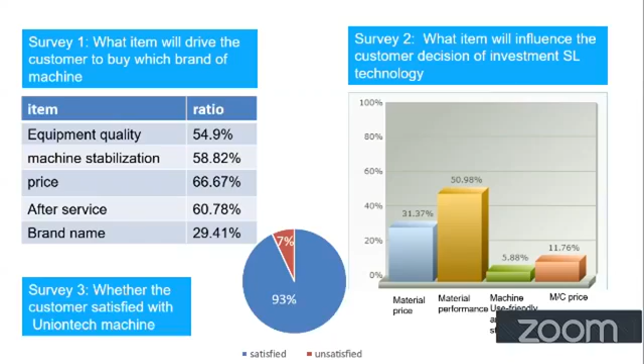Now we're happy about the result - there are 93% of the machine user owners happy about their choice to go for UnionTech. Still, we have some other 7% to fulfill in the future.

Now I would like to go through briefly about our technology and our products.

This SLA technology, from the right side, I can explain briefly by this simple structure map. By using a laser source, it will go through the scanning mirror, and the laser beam will scan on the liquid surface.

The part is built from the bottom to top, layer by layer. There is a Z-axis lift platform - once we finish one layer printing, the platform will move down one layer thickness to continue the coming new layer printing.

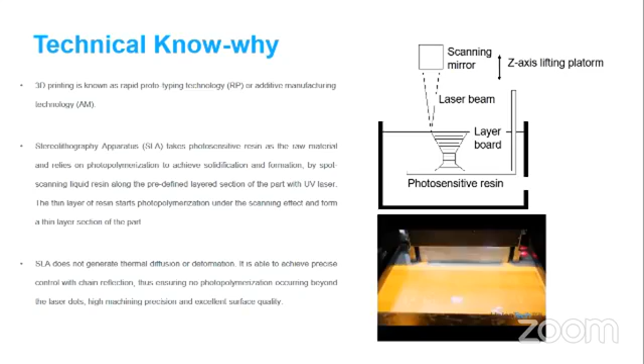And the active image in the right down corner just shows the general process of our building envelope.

Some features about UnionTech technology ensure high stability. I think there are three main systems to ensure this result: the first is the controlling system, the second is the optical system, and the last is the mechanical structure. So I will introduce the three systems one by one.

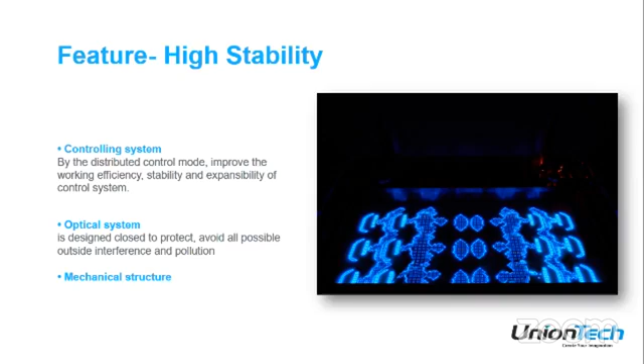Firstly, every single UnionTech machine has a hard granite base. This granite base ensures their recoater moves smoothly and gets accuracy - no flexing, a stable platform. This kind of granite base is a very good choice compared to steel, because it's not affected by temperature or environment.

And from the result, it will give printing quality that's very good, excellent surface work, and ensures very tiny details.

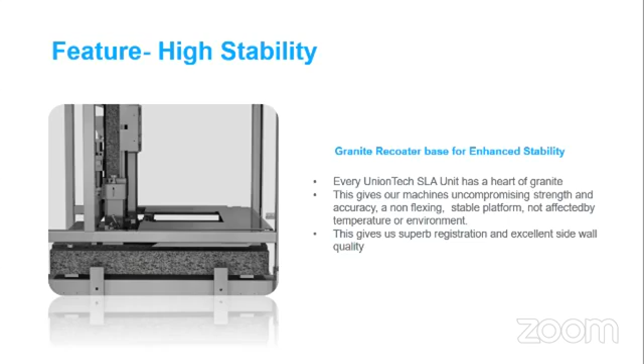UnionTech cloud package - from the left side, as you can see, we offer some packages to customers. One is our own printer, then for data processing software, we have some different choices for our customers.

We offer Magics from Materialise to our customers. As you know, Magics is a very common universal data processing software globally, and we have had the partnership with Materialise since 2002, 18 years ago. There's even a tailor-made software called Magics BP, Building Process, linked to UnionTech.

This is a tailor-made software for UnionTech, and we can sell this tailor-made software all around Asia - Pakistan and the Middle East are definitely included.

Meanwhile, we also developed our own data processing software, Polydevs, which is a much more affordable technology. You can get the main functions to deal with the data, to do the slicing, to add the support, to check the surface holes, etc.

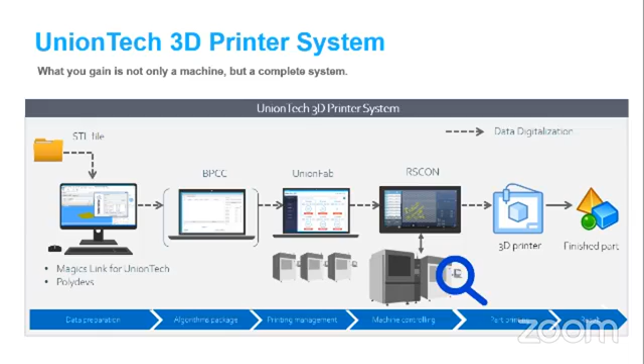Meanwhile, UnionTech also provides a full package of post-processing machines, like the cleaning machine, like the UV oven, etc. From the finished part, we will give you a guideline on how to do the whole process to get the final part. And even with our people, we'll talk with you about how to do post-processing treatment based on the part. Now, some key features about our technology.

Firstly, it's cost effective. As you know, the first commercialized SLA printer was made by 3D Systems, a US company, but their price is quite high, and the system may not suit the Asian market, especially in China and Pakistan, because these are still developing countries, and people here need much more affordable technology.

The second feature is open system. I think the main part is an open system for the material. Not like 3D Systems, which is a blocking system where you can only select their own resin, which is very expensive. For our system, the material system is totally open. You can select any 355 wavelength material.

Meanwhile, we will offer some purple resin to our customers, which can ensure the printing quality and result, because we have finished testing and have the parameter package. The open system is also for parameter setting from the software side. And the last open system is open for different applications.

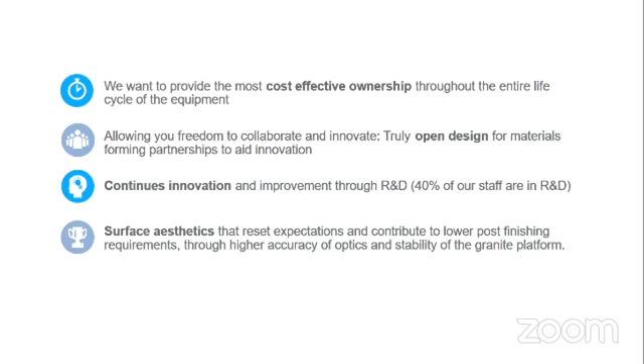Our product line covers different technology and products for different markets: the RSPro series and the Pilot series. This is high-end, high-value technology. We promote the RSPro and Pilot series mainly for European countries and US companies, and the Lite series, shown in the right-down corner, is a very economic choice for APAC countries, Asia Pacific countries.

We now have two kinds of DLP systems. One is for dental applications, with two models: the S110 and the E120. We have dental materials for dental crowns, bridges, casting, and fixed models. The other kind of DLP system from UnionTech uses a 4K high resolution projector.

These are our models Cute 380 and S300, with a large building envelope. Customers can get a platform printed finished quickly and with good accuracy.

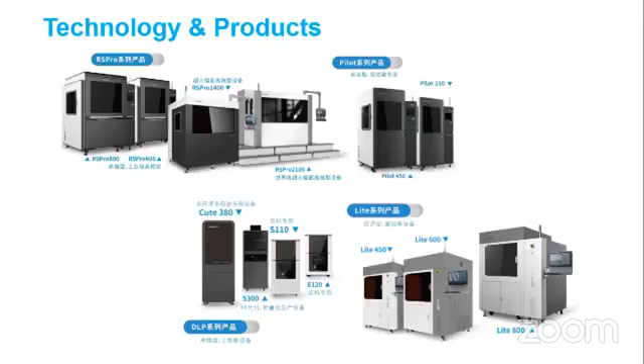This is a poster we normally use at exhibitions for our SLA system. The building platform starts from 250 millimeters up to 2,100 millimeters. This is currently our biggest building envelope: 2,100 by 700 by 800 millimeters.

Some key features - I won't repeat most of them, just let me focus on the multiple material choices. We've had a partnership with DSM Somos since 2001, just one year after our company was established. We promote their resin, and BASF is a new partner for us in Europe.

We also have our own materials to offer to customers, especially in Asian countries. We have suppliers from Chinese manufacturers who can provide very good resin, reaching similar results to DSM, but at maybe half the price.

Future development for our printers: we will go for some industrial, larger size machines. Now we have a 2-laser system in production.

A bigger size platform is one direction for us. We now have a 2-laser system with a building envelope of 1.8 meters, and the 3-laser system is for 2.1 meters. As you can see in this picture, the whole cover from an air conditioner, and the bigger size machine can easily print car bumpers and dashboards in one piece.

The second development for us: we will do some automatic calibration tools to reduce human error. Currently we have an automated calibration plate with nearly more than 1,000 checking holes to ensure every point of the platform gets accurate printing.

The third direction: we will also develop smaller and larger DLP technology based on dental applications, and of course for general industrial usage. The fourth direction: we will have automated tank mixing for the filled resin. Last but not least, improving the scanner speed to increase productivity is also a goal for us.

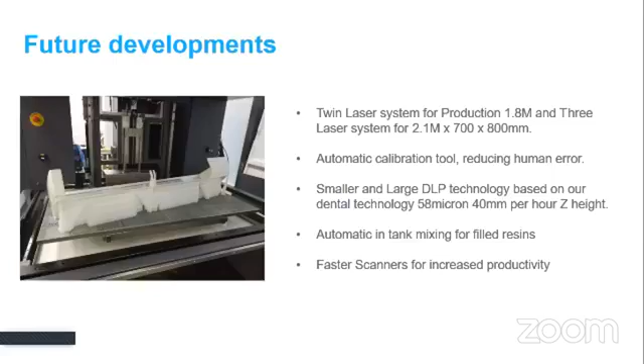You can open different levels for different people. For some operators, it just opens the operator level, which lets them operate the machine for daily usage. Engineer level gives the after-service team easy access to check machine defects. Expert level lets you control the machine's core parameters.

UnionTech has been a partner with DSM on the material side for 19 years, and with Materialise for 18 years. We are a company dedicated to creating loyal customers through our innovation and cooperation with you.

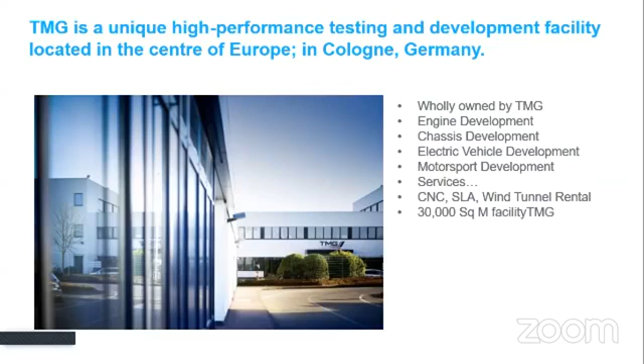This company has a lot of technology - they do engine development, chassis development, and electrical vehicle development. Now they have equipment for CNC and SLA to do some wind tunnel testing, and there is customer development by three parties.

This project is based on a partnership with a 3 year plan, and we provide 2 systems to the customers. One is 250 millimeter size, the other is 800 millimeter size. This 800 millimeter finally is being purchased by TMG because they will use this machine for production usage.

They provide customer parts printed on SLA for wind tunnel models, injection molding, insert tools for some motorsport parts for some racing events. And also they do some vacuum casting and some RIM casting for some usage.

The main material I will introduce later is DSM Perform for the tooling, for the wind tunnel.

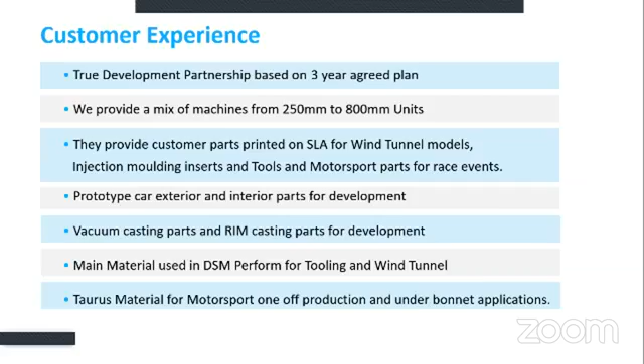Now I will introduce some SLA material for different applications, especially for various steps in manufacturing. As you can see from this picture, from the left side to the right side. From the design part, I think the very entry purpose is just to visualize their prototyping.

The second, go further to do some evaluation. You can do some functional test, and then if we go for some pilot process, then you can use the 3D printing SLA material to go for some rapid tooling, to go for some investment casting, and for some manufacturing process, and it will be good for some jigs fixtures application, for some dental aligner mold, for some footwear casting mold, and also for some compensate tooling.

And the last manufacturing could be the direct end use. We can use the SLA material to print some medical guideline tools for the doctor and patients.

The first is visualizing the prototyping by using the ABS-like resin, and the color is generally white. This picture is from Somos, it's GP Plus, and meanwhile we do have some other Chinese material with similar function. They all have the advantage of excellent surface quality and very good efficiency, and are easy to post-process.

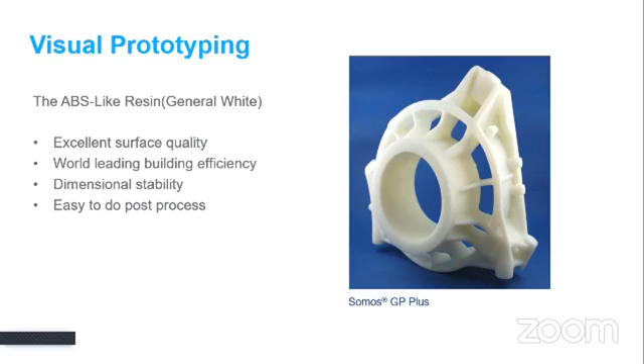You can do the painting on the surface, you can do the finishing, they are all okay. And for visualizing the prototyping, another main material is the transparent material, which gives the customers very high clarity and is virtually colorless. As you can see, these bottles here, they're just like glasses.

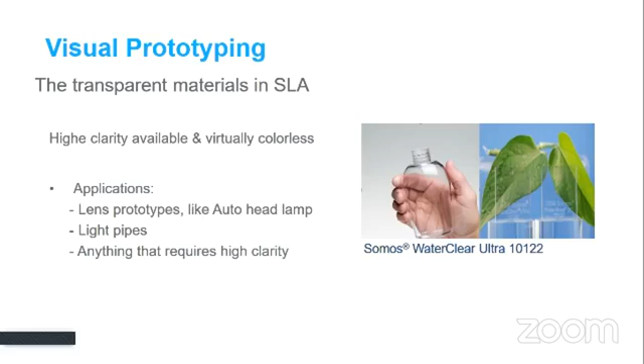Of course, this picture has some post-processing treatment, but this material is a very good choice for some applications like lamp prototypes, especially for the automobile industry, and for some light pipes, and anything you require transparency, you can get this kind of material.

DSM Perform is a ceramic material, and this material can take 268 degree temperature resistance. It is a very ideal choice for some insert tools.

By using this material you can get the final parts, small batch production, in a very short time period. I have a case story on my following page. Here it is.

This Perform material is a composite SLA material. The tensile modulus can reach 10 GPa. The heat deflection temperature can reach 268 degrees, and the benefit for their mold is strong stiffness, fine features, and smooth surface.

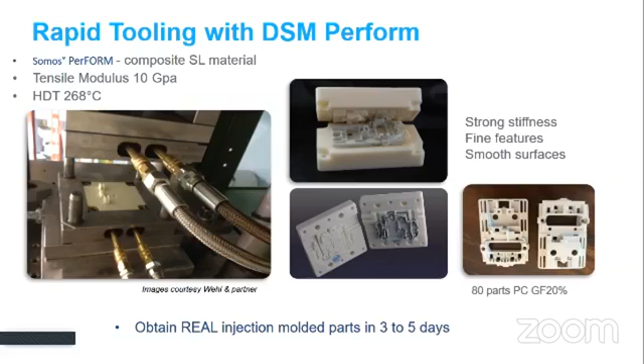There is a case study we have done in China to get real injection parts in 3 to 5 days. Normally it would take, I think, nearly 1 month's time. Here is a video I would like to play for you about the injection molding applications.

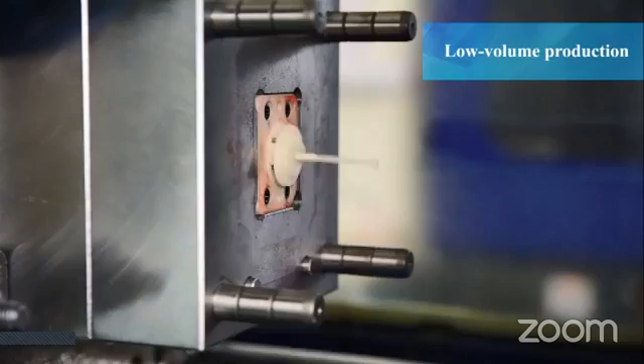Get some finer detail parts.

This DSM Taurus material is also very good for some racing car molds. This picture is a racing car for the Formula One team. We do the wind tunnel test, and they also can do the metal coating on the surface for some parts, for some real usage.

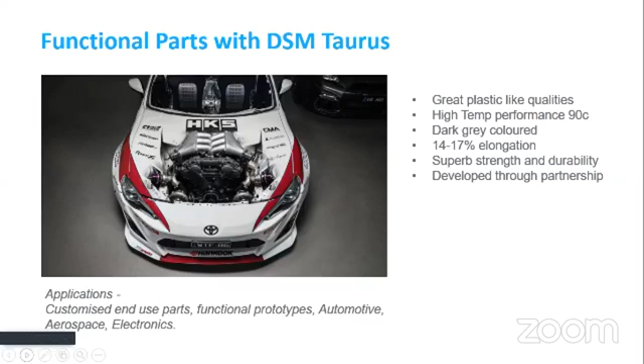The application we can match some functional prototypes from automotive, aerospace, and for some electronics. This material is a combination of high temperature resistance and high toughness. As you can see, the right picture here is a testing part we made for some engine cover.

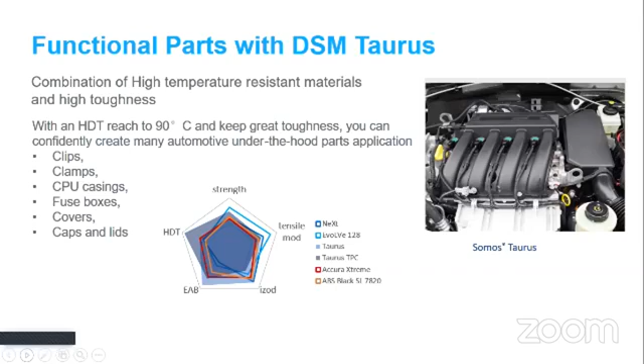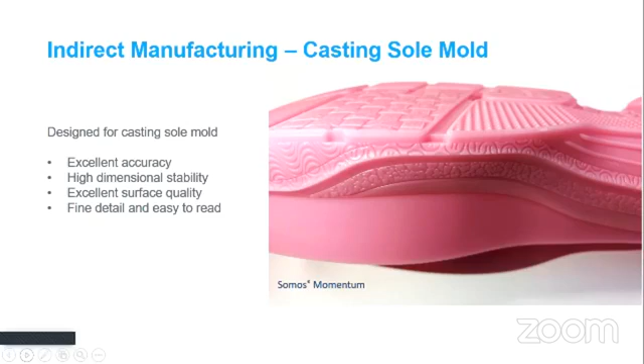The other indirect manufacturing application is the casting sole mold. You can see from the pink shoe mold, the texture we can reach in every detail. The accuracy you cannot suspect, and the details we can reach from the design.

The other interesting application is investment casting patterns for sculpture. The left side is Flying Yellow, designed by a very famous designer in China. They previously went for SLA patterns for the casting, for the bronze casting parts. This sculpture is 15 meters high, and we also have some video to share with you about their casting process. You can contact Quality Solution later and we will share this video with you guys.

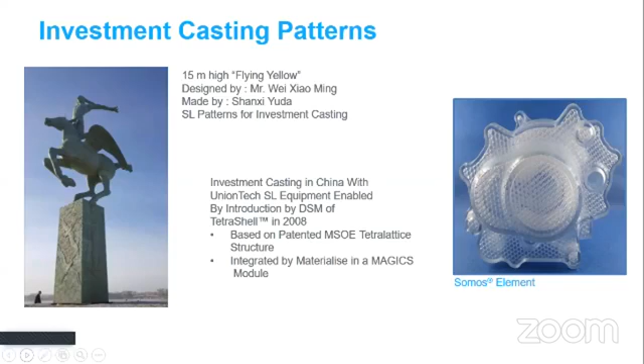There are some good ways we ensure the casting patterns. There is a very good function called TetraShell in Magics, a function now integrated by Materialise. And for material, we recommend DSM Somos like Element and Watershed 11122.

For their end use part, we will recommend a material called Somos BioClear. It has FDA approval certification, but there is still a long way to go, because the medical direction needs a lot of long-time testing.

Okay, some last key facts about us. Now I think we are the largest dedicated supplier in SLA and fully open system and material. Last year, in 2019, we sold out 860 large frame SLA machines. We dominate the Chinese market with 15.5%, and we are a major supplier with DSM since 2002, and a major supplier for Materialise software since 2001.

In China, we have a lot of installations, as well as in Asia. We now have subsidiaries in the US and Germany, and we invest 14% of our revenue back into R&D. We have some patents for our applications. There are 5 locations: one headquarters located in Shanghai, and 4 global branches in Vietnam, Moscow, Frankfurt, and Chicago. Now we have a lot of global resellers. We plan to have 50, and we are close to that figure.

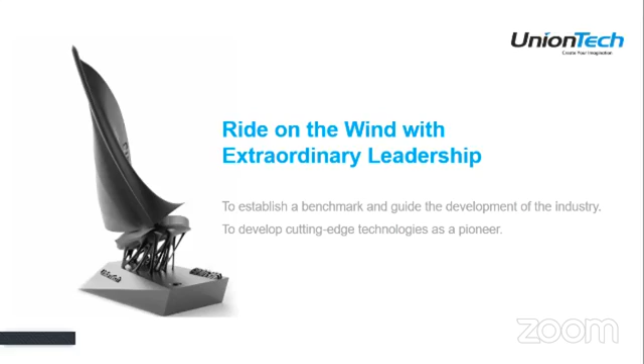So that is all for my presentation I prepared. Now I think I will be open for your question. Now maybe I will invite back Dr. Ijaz.

Hello, Jeffrey, I'm here. Okay, thank you for the presentation.

As I saw all your presentation, I have some questions. Please answer them, and maybe you have some video related to the different topics I'll ask about. Also there's some process required. First, regarding the investment casting process, how can a 3D printer replace the investment casting process? If you have a video for that, please share it with us. There's also a technical question regarding this.

Just one quick question, can you hear the voice from my video? Both is possible, because I would like to show them how the printer is, as I saw when I visited there. So please share. I will, yes I will.

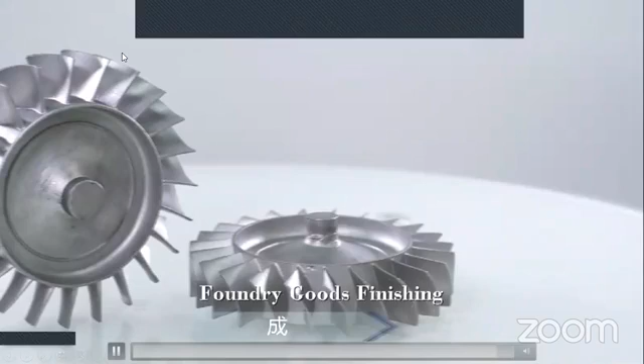That is all for this video of investment casting. If the casting process is interesting for your customers, maybe I could go through another presentation briefly to introduce the investment casting process. Yeah, please, is that okay? Yeah, it's okay, fine. Okay, let me find it.

I saw some questions, maybe you could let me know later. Yeah, there are some questions, but we have 15 minutes. We can show one presentation related to investment casting, and second, I would like to discuss the die and mold process, which is also performed by the 3D printer. After that, there is a question I also wrote down, so I will ask you. Okay, no problem. I need some minutes.

Okay, here we go. I will share my screen again. Yeah, please. Can you see now? Just waiting. Yes, we have it now.

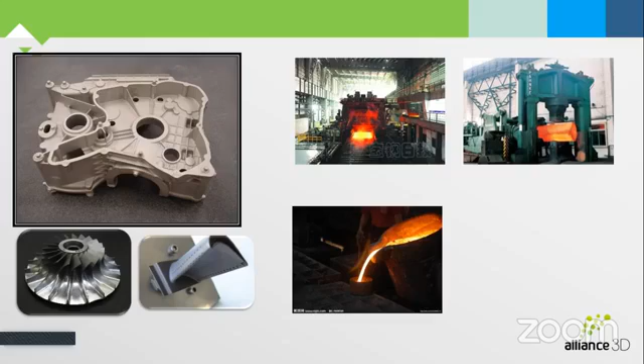Okay, and this is Alliance 3D, also our other brand in China dedicated to application research. So this is a general picture to give you a casting background, and how to make it - rolling, forging, or investment casting - is the right choice.

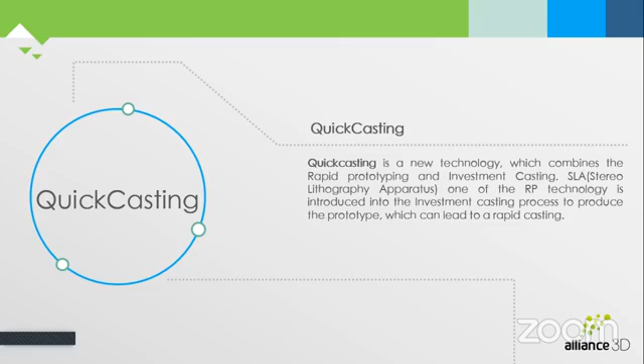So quick casting, or investment casting, a similar idea, is a new technology which combines rapid prototyping and investment casting. SLA is the main technology to introduce into the casting process to produce the prototype, which can lead to rapid casting. Also this is a map, a general idea about what SLA is. I will not repeat it again here.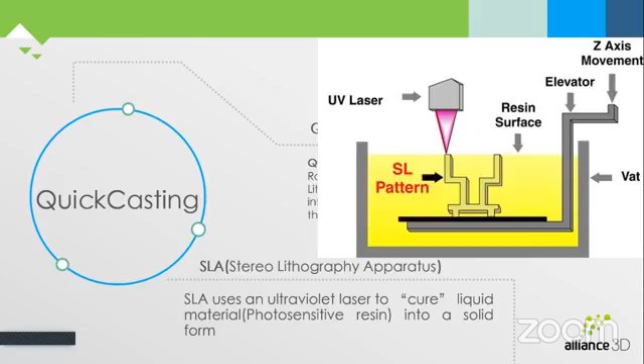And why we use quick casting - from this picture you can see there are different processes for casting: to create the pattern tree, to create the shell making, and then to do the investment casting for the liquid metal. First is to obtain the patterns, then do the shell sintering and investment casting.

And the quick casting, as with investment casting and SLA here, I think we can easily replace the traditional mold design, mold making, and wax pattern making by digitalizing the three steps into one SLA pattern making. This is the general routine for the process.

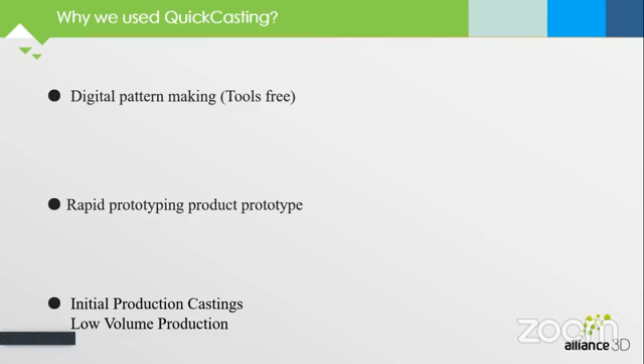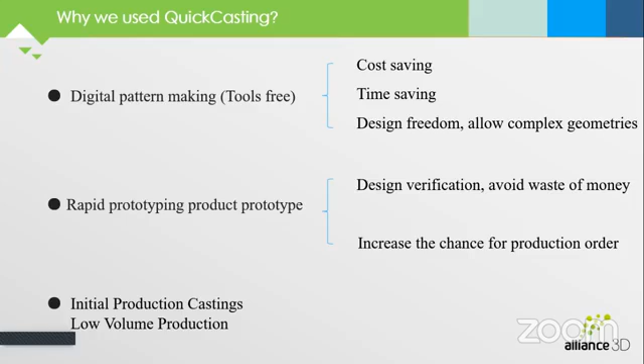And why we use quick casting: the digital pattern making is tool free. It will save cost, save time, and give design freedom - it gives the designer unlimited freedom of their mind. Rapid prototyping and product design verification avoid waste of money and increase the chance for production orders.

The key point is that SLA can be used in investment casting. SLA shell can replace the shell dewax and shell sintering. I will give you one minute to see these pictures.

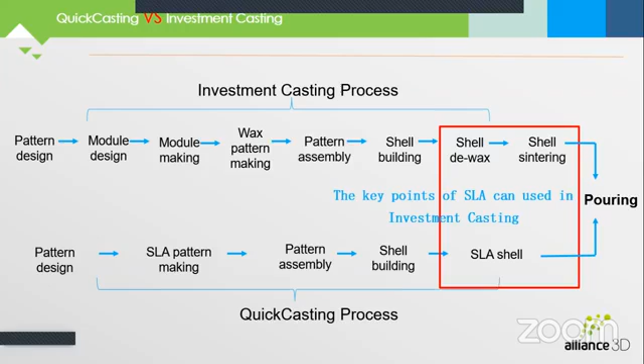This is the traditional direction: pattern design, mold making, wax pattern making, pattern assembling, shell building, shell dewax, shell sintering, and then pouring of the metal liquid. And here, quick casting: SLA pattern making, pattern assembling, and shell building. You can see we can combine some steps and shorten the process.

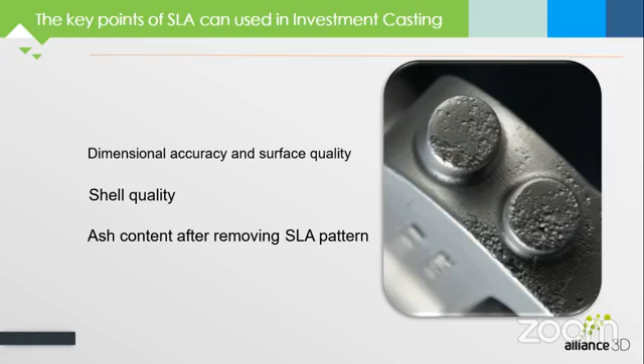That is also a key point - SLA has the highest dimension accuracy. Normally for a dimension of 100 millimeters, the accuracy we can reach is 0.1 millimeter among different technologies. Secondly, SLA has the best surface quality compared to other technologies. And SLA is the only RP technology which can be used for assembly inspection.

So there is a special resin for investment casting - high accuracy surface. As far as my concern goes, nowadays the most popular material is the DSM Somos WaterShed 11122, or the element. This is the ideal choice.

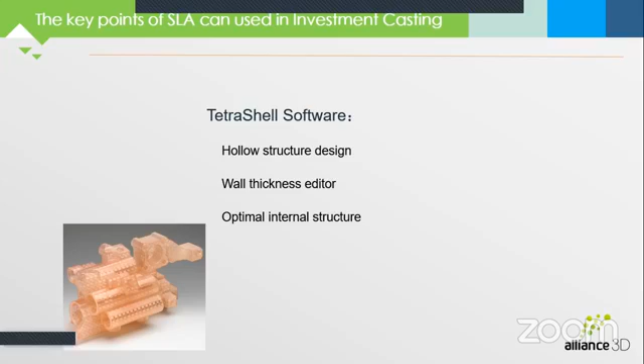The hollow structure will allow the patterns to collapse inwards as it expands rather than exert pressure on the shell. The hollow structure design can also save building time and material.

Here is some image for this TetraShell hollow parts. This is the wall thickness, we can check the site here.

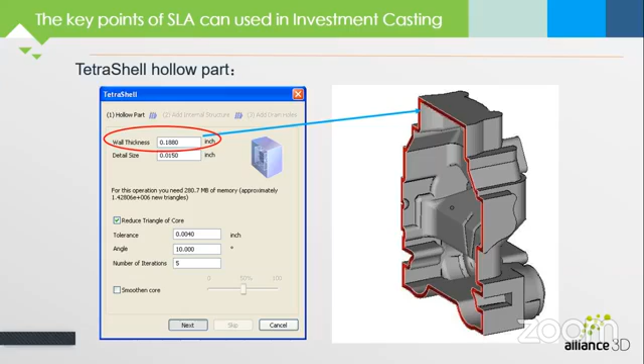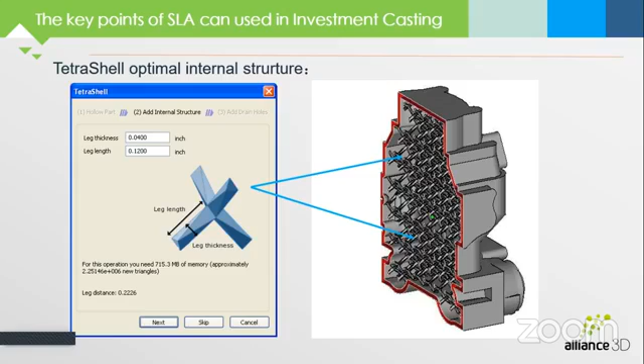The TetraShell internal structure here also ensures the part being built stays stable, and the TetraShell drain holes remove the residual uncured resin in the part. We can create some holes when sintering the shell, and the inside material will burn out and flow through this hole.

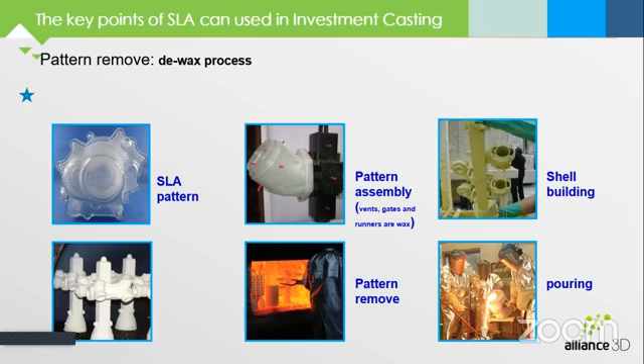So the pattern removal is also called the dewax process. SLA uses photopolymer, a photosensitive resin that cannot simply melt like wax, but must be burned out at high temperature, while the dewax process is still necessary to remove the wax.

Here are SLA patterns, and then we do the pattern assembling to create the shell, then this is the pouring, the liquid level, and the pattern removal by high temperature burning. The temperature, as you can see from the video, can reach 800 degrees, then you will get the dewax process.

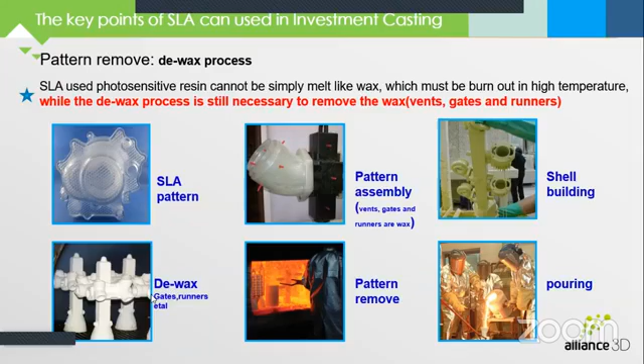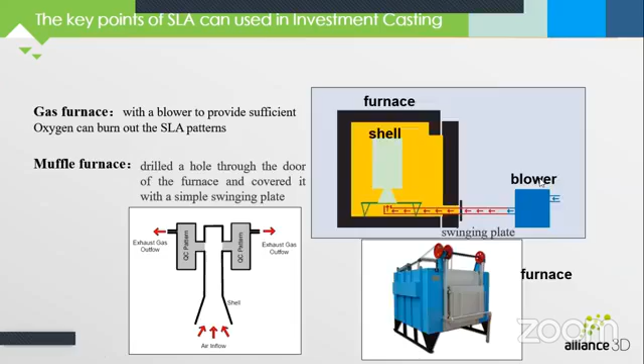The sintering process can be divided into 3 steps. The sintering temperature is determined by the refractory we use. However, normally the resin burnout temperature is around 815 degrees.

Tip 1: the resin burnout temperature and the crystal transformation temperature should be considered according to the refractory used. Tip 2: after the resin is burned out, the shell should be cooled down to room temperature to remove the ash inside.

Tip 3: preheat the shell according to the refractory used and prepare to pour the metal liquid. Before the final pour, the exit vents should be filled with the refractory mortar.

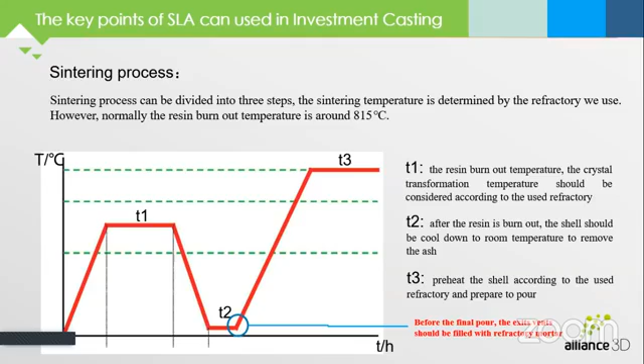The residual ash content is a very important factor which affects the surface quality and the internal defects of the cast.

Using compressed air and water to clean the ash inside, and then using antimony-free material for specialty alloys to lower the ash after burnout.

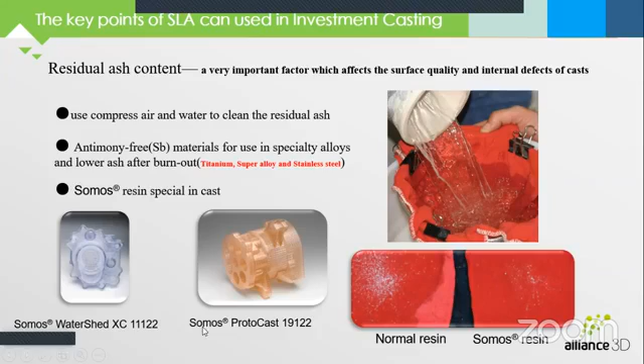These are 2 different kinds of material, especially for casting: WaterShed XC 11122, also from ProtoCast. Now the new name should be the element.

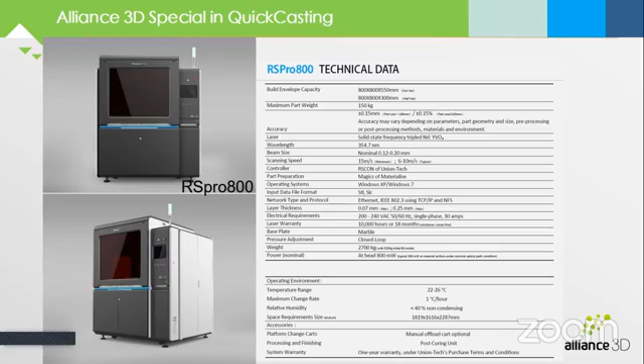This again introduces our build machines. I will not repeat it; you can get the technical data for our large frame SLA printer from Quality Solution from Mr. Ijaz later.

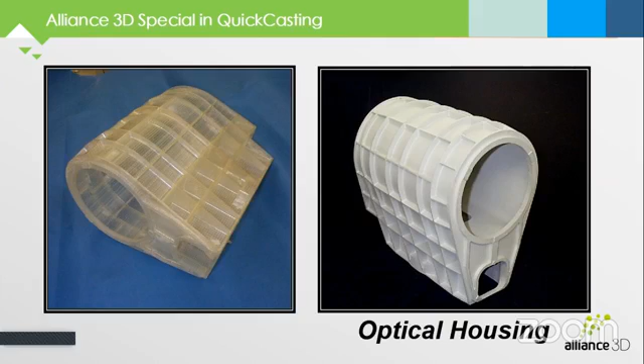Here are some pictures we cast out with our customers. This is some Volkswagen part, an optical housing. Left side is the SLA pattern, right side is the metal part being cast out.

This is also a case study from the US, for some Navy usage, and the total production is more than 200 units. The saving per unit is around $2,700. This reduced 13 parts into one combined part, so the total savings is more than $540,000.

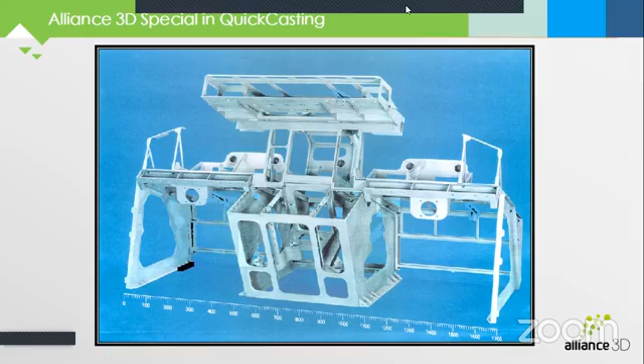I think now it could be time for me to answer your questions. Is that okay, Mr. Ijaz?

Next, I just want to ask if you have any presentation or video related to the die and mold process through 3D.

No, I think I didn't prepare for this. Sorry, you have the video for that, you just run the video. A video? Sorry, do you see my list? Okay, if not, then we can carry on with the questions. If you have it, you can just run it. No, I think we don't have a die mold video here. Really? Oh okay, let me check.

Actually, it's a very impressive process of mold making. It's also a case study for that, which the 3D printer can produce, just one if I have it also.